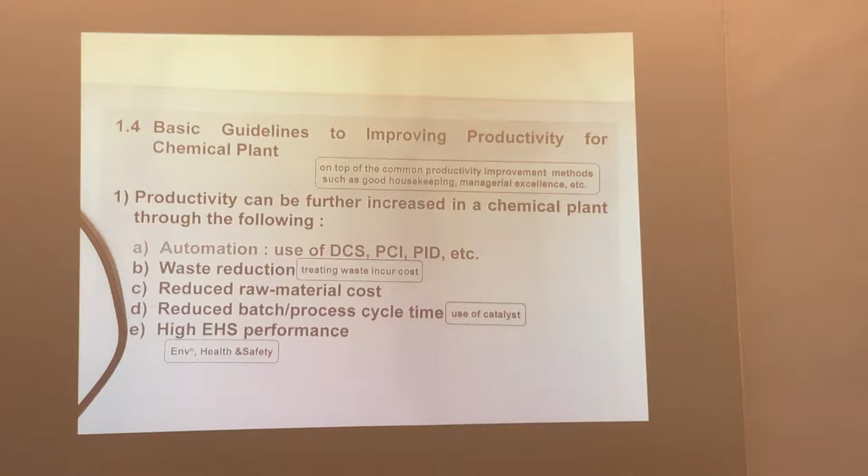So just turn it off. This one, okay. But then these people, they can't go see, you know. It's so bright, right.

Productivity doesn't necessarily always mean higher output. You can have times where the economy is bad, but your productivity can still go up. You can maintain the output, but reduce the input, and productivity will still go up, am I right?

It's just like now in Singapore, the banks are all making a lot of money if you follow their profit and loss statements. Why is the Singapore bank making so much money? It doesn't mean that we have so much more money to spend and give to the bank.

No, you notice that the banks have all introduced internet banking and whatnot, and you notice that many POSB branches have closed down already. There used to be one across the road, now no more. So they save on the cost, they save on the input. So even though the number of customers doesn't increase, productivity can still go up.

So don't always think that productivity must go together with an increase in output.

Let's look at the chemical plant. The best way to improve productivity in the chemical plant is to use automation. You can reduce costs, reduce input, or have better output, higher quality output.

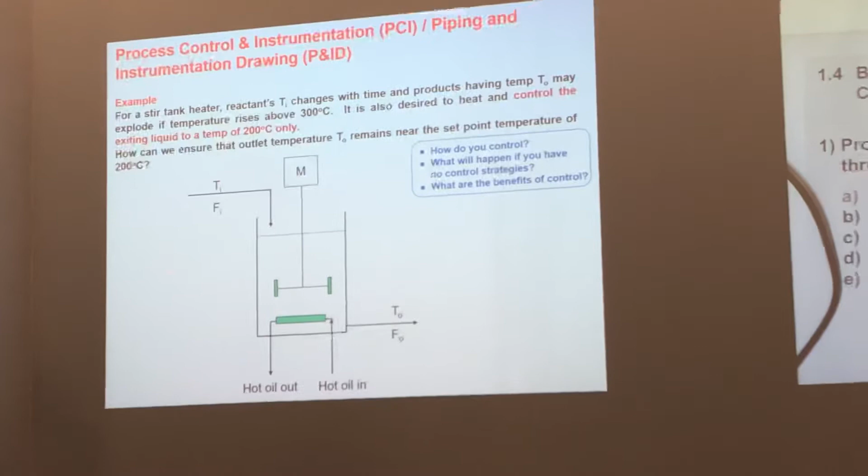In this case, you want to control the liquid at 200 degrees Celsius. So what do you control? How do you control it? What will happen if you don't have any of these control strategies?

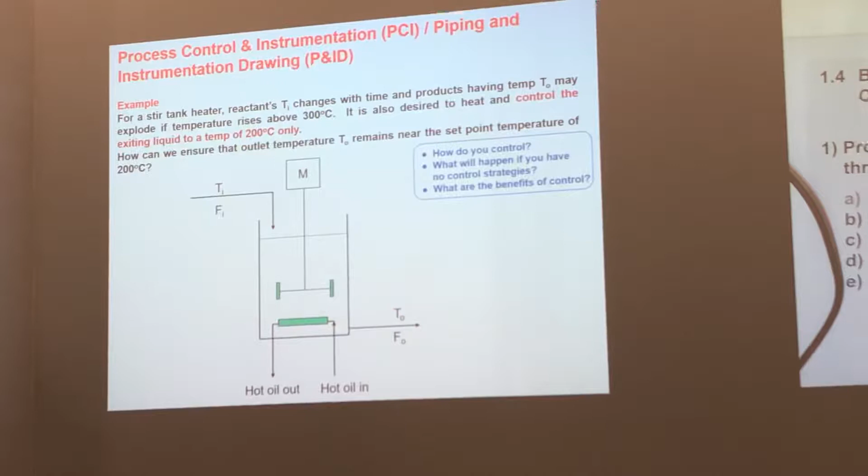If there's a high temperature or low temperature, the reaction is not ideal, right? So you need to introduce a control system, as you can see here, which is automated in nature. You must have a control system that can detect the temperature, which is what you want to control, 200 degrees Celsius. It must detect the temperature, and then send a signal to the controller, which will compare it with the set point value, which is 200 degrees Celsius.

And if there's a difference, the controller must send a message to the final control element, in this case the valve, to either allow more hot oil into the reactor to heat up the liquid more, or to reduce the flow rate so the temperature will not be too high.

Okay, so this is your P&ID, your piping and instrumentation drawing. In the P&ID you will learn there is a control. You want the control at 200 degrees Celsius. The control system are what? The sensor, temperature sensor, then the transmitter, the transmission line, the controller, and then your final control elements. So all these are part of your P&ID. I'll go through it fast since you learn this in your P&ID as well.

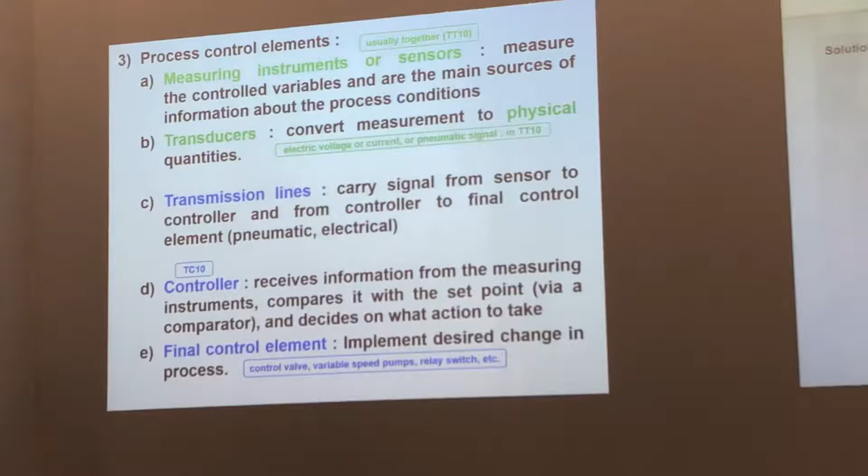Measuring instrument. In this controller, there are two things here, the very first one. One is the measuring instrument that measures what you want, a temperature, pressure, flow rate, or whatever. It must be the first one because it's in contact with the flowing liquid. So from here there's two functions: one is to measure the variable you want to measure, in this case temperature, and then once it measures...

There's a transducer inside this. The role of the transducer is to convert the variable you measure, such as temperature, into a physical value, such as current, voltage, or pneumatic pressure, all these sorts of things, and then transmit it to the controller via the transmission line.

You saw from your P&ID, if you have a slash like that, it's a pneumatic transmission line. If it's dotty like that, it's an electronic signal line, electrical. The rest is not so common. Most of it is the dotty line, which is electrical, or pneumatic, which is this.

So obviously it can't transmit the message '200 degrees Celsius,' am I right? It can't transmit, no, it has to change to something. Let's say 200 degrees Celsius is equal to maybe 2 volts. And then when it comes here, it will compare it with the controller. 200 will be 2 volts, so if it's more than 2 volts, maybe 2.5 volts, it will probably interpret that as high temperature. So the transmission line transmits the physical value to the controller.

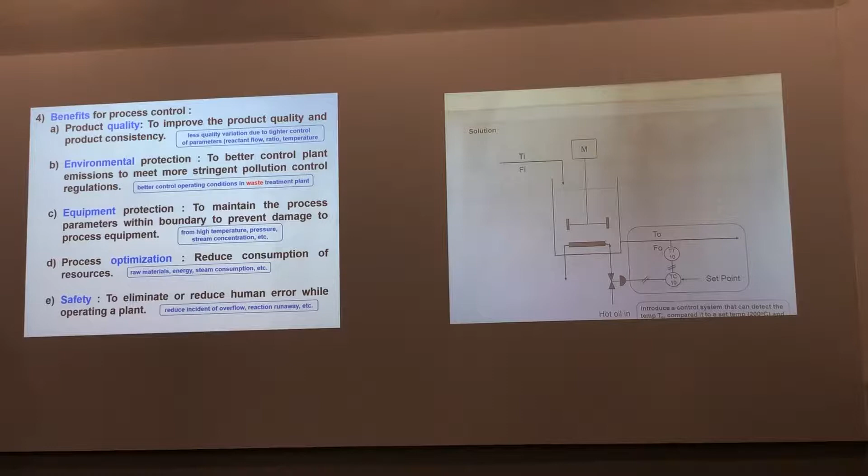Just now we talked about this already, the transmission line. Most of the time it's either pneumatic or electrical signal. I don't even have this slide. The balloon, you see all these sort of things here? No, balloon is different. Is it the same, exactly the same slides as your P&ID? No.

So your balloon here tells you what they are, what are they controlling. The actual instrument tells the function and the nature. So in this case you see a TT, that tells you what they are already. TC tells you another thing. The 10 is just the control loop number. So in this case, this is control loop number 10, meaning you probably have another control loop doing other things from 1 to 9 before that.

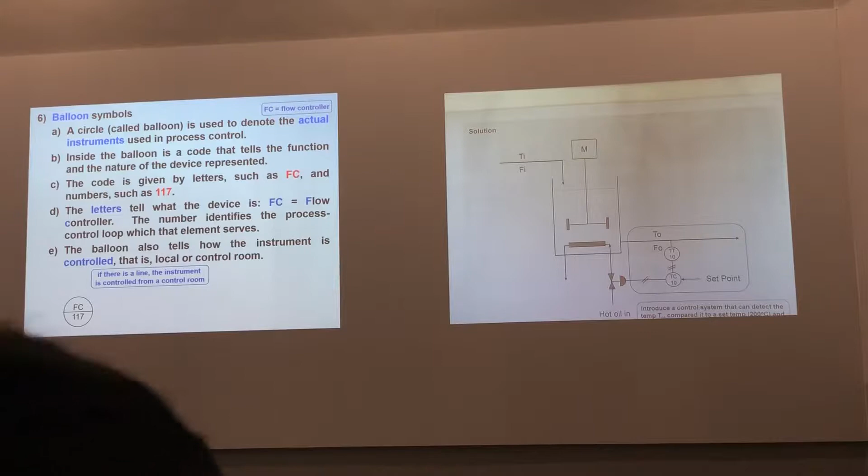The alphabet, depending on whether it's the first or second letter, tells you different things. For instance, take T. If it's the first alphabet, it means temperature. If it's the second alphabet, it means transmitter, which just transmits the value. So if you say TT, it means you measure the temperature and then transmit it. If it's FC, F is the first alphabet, so it means flow. C is the second alphabet, meaning control, so flow controller. Depending on the alphabet, it tells you different things.

If there is a line to it, like this one here, it tells you that this element, this flow controller, can be controlled from the control room, the DCS control room. That means changes can be typed in from the control room and reflected there without leaving the control room. But if there is no line, the control room can only see the value. If you want to make changes, you have to walk up to the plant and manually enter the value into the control elements there.

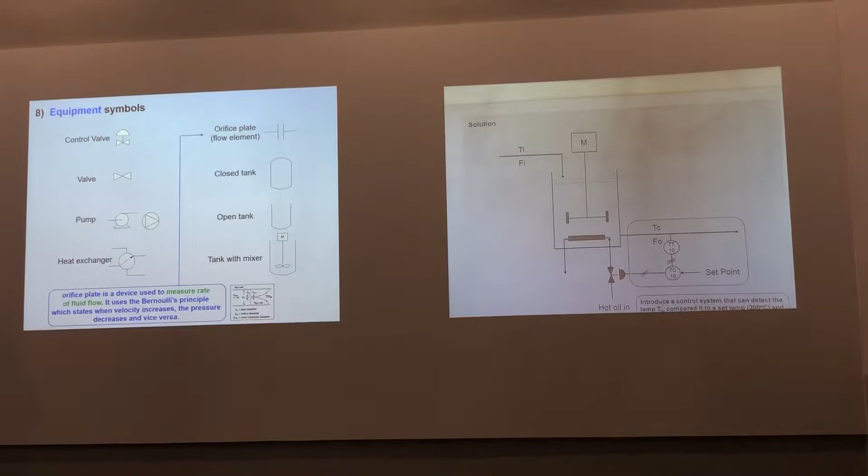These are some of the symbols we use in P&ID diagrams. We've done this already, so can you identify the elements of the control system here, guys? What are the elements of the control system?

This is T. The first T stands for temperature, temperature measuring. Then the second alphabet is also T, so it's a transmitter, which most of the time includes the transducer, which converts temperature to air pressure, pneumatic here. Then this will be the transmission line, the pneumatic transmission line.

This is your controller, the C, second alphabet, and this will be your final control elements. If the temperature is too low, it will ask the valve to open more to allow more hot oil to go in. All this is done automatically, so the temperature is always around 200 degrees Celsius, plus or minus a little. Every single second of the day, 24/7, this is working, always controlling the temperature tightly at around 200 plus or minus a little.

Certain terms you use in PCI: your control variable, your set point, your manipulated variable, your disturbances. Bear in mind that your control variable can be different from your manipulated variable.

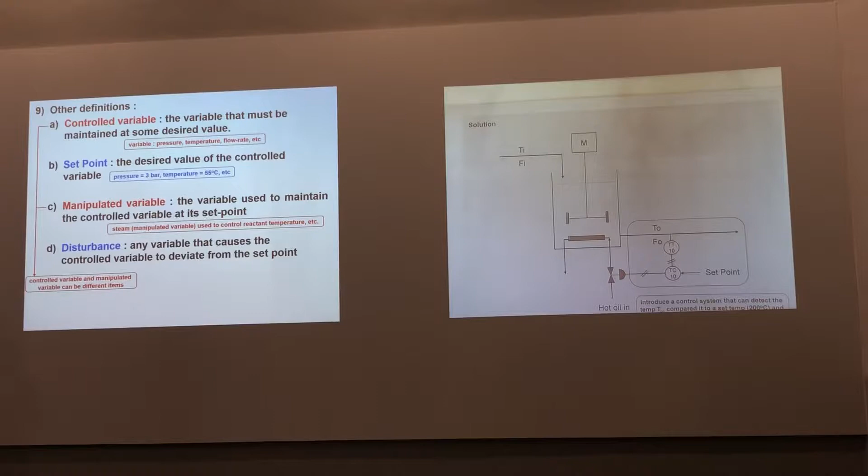Now, everything is answered, it's all there already. Can you tell me what the control variable is here? What do you want to control? You want to maintain the temperature in the tank at 200 degrees Celsius, am I right? So the temperature of the fluid inside the tank is the control variable. The set point is 200 degrees Celsius. The manipulated variable is what you manipulate to ensure the temperature inside is always 200 - the flow rate of the hot oil, not the temperature of the hot oil.

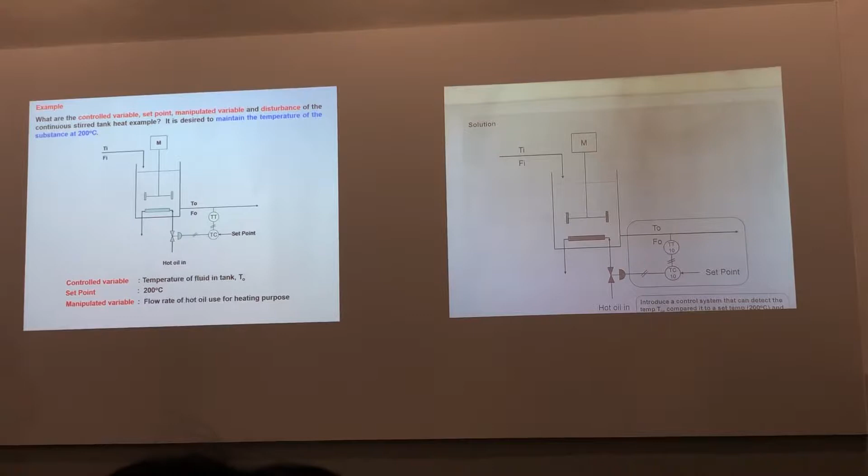And disturbances, how can the temperature not be 200 in the first place? It must be the inlet reactant temperature, am I right? So the inlet temperature could vary, could be more than 200 or less than 200. Alright, we go quickly through this one because you'll learn it again in your PCI course.

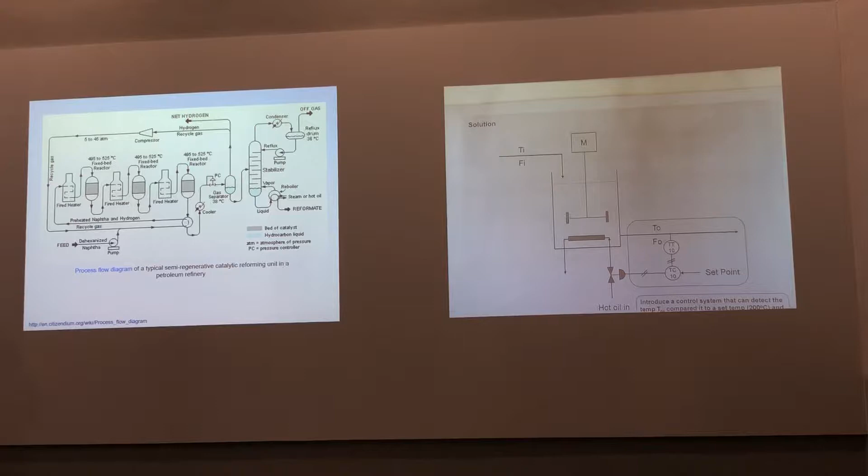Beside PID, you also depend on process flow diagram. Process flow diagram is much simpler. It gives you an aerial view, the overall view of the processes in your plant. You can see here there's a heater, a reactor, a distillation unit, all this sort of thing. It gives you a better view of the processes happening in your plant, and it shows where things go after each unit process. It's much simpler, so it doesn't have minor details like flanges, bypass lines, or control loops. But it does give you an overview of the process.

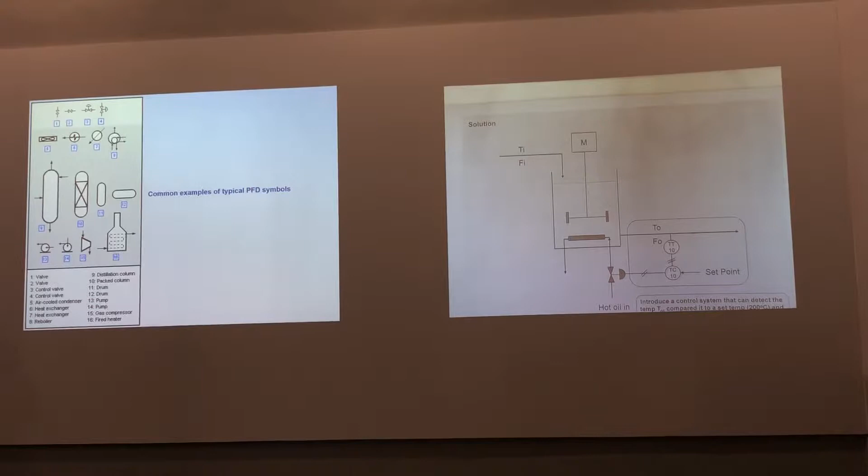Some of the symbols used in PFD diagrams: this is always a heater, a hot oil heater. This is your distillation unit, a distillation column. This will be your heater, heat exchanger like that. More of these PFD symbols you learn in your PCI, so I won't stay here too long.

Now can you just tell me the answer for this quickly? Is it distillation column? What is a distillation column, or a packed column? Pump - centrifugal pump.

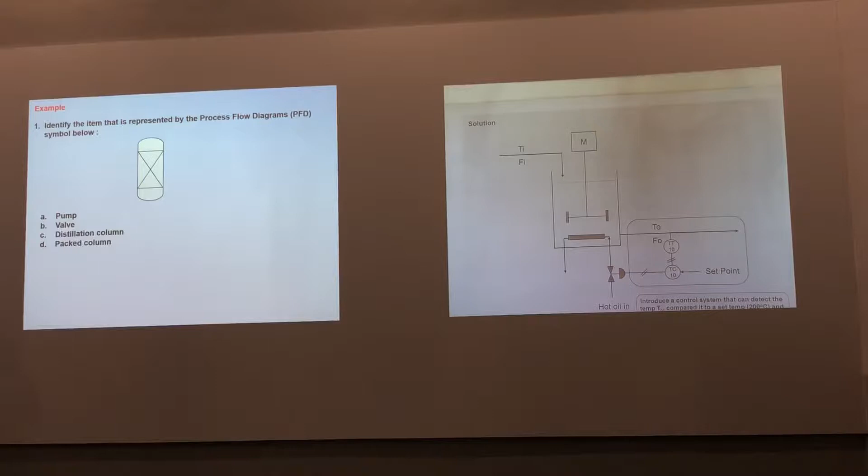What is it, guys? It is a pack column, pack column with the X inside there. Pack column means inside there is packed full of things. What's the purpose of the pack? To encourage interaction - make life difficult for the liquid inside to flow.

You have two liquids, either gases or liquid, most of the time liquid. One is flowing from the top, one from the bottom. So they have to go through this, turn here, turn left, turn right - more mixing time, more interaction, more time for one solvent to move to another liquid. You use this in your unit ops liquid extraction column. Okay guys, thanks. Anything to copy here? No, I guess, it's also provided. Everything is there, okay.

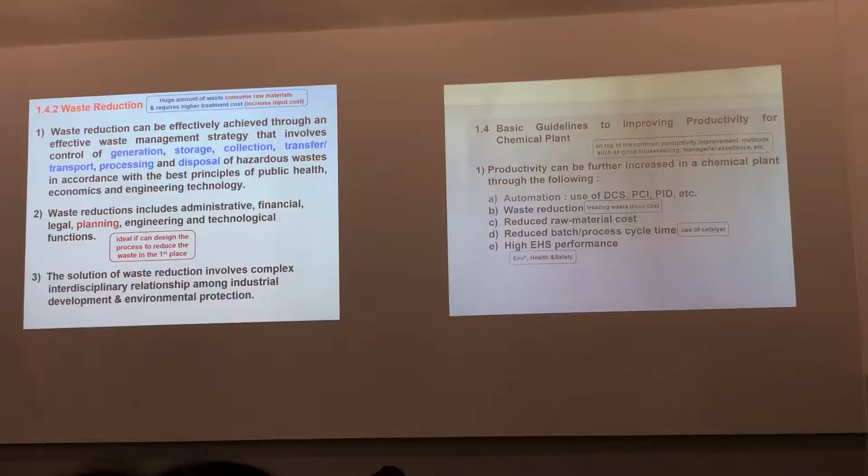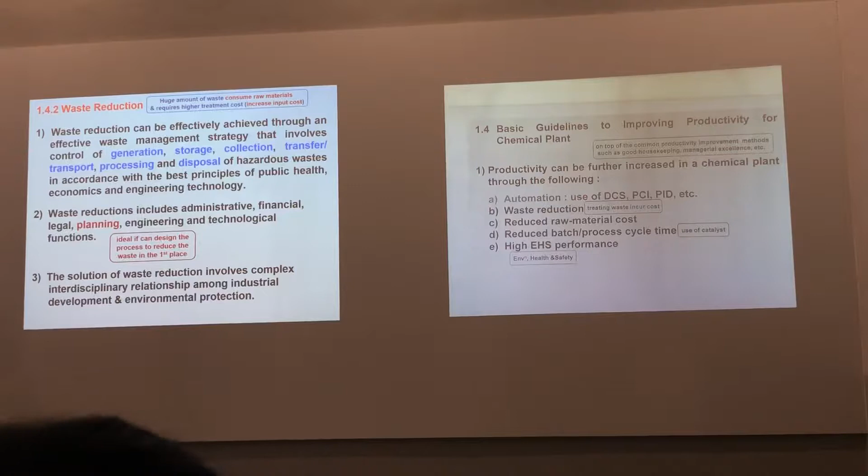Next, how can we improve productivity again? We can reduce our waste, am I right? Reduce waste means reducing your raw material costs, because waste always comes from raw material. You also reduce your treatment costs because waste generated needs to be treated. So you save two things: raw material cost and treatment cost. So on output divided by input, the input goes down, productivity goes up.

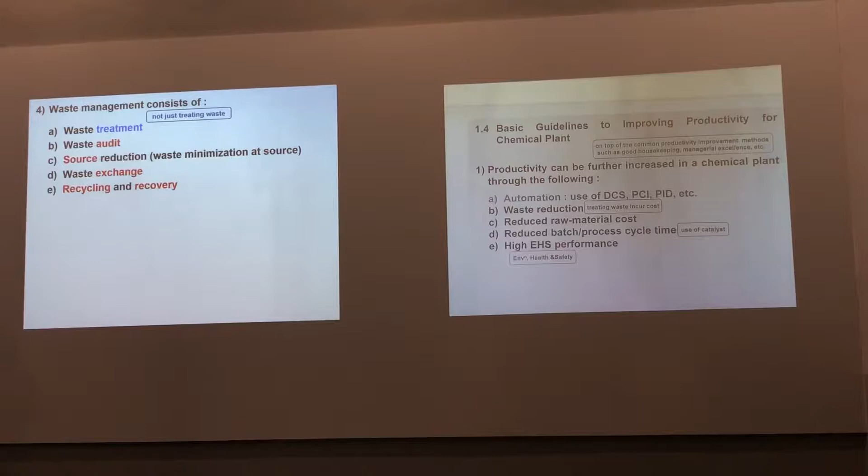Waste reduction is a big thing. You should monitor your waste from the moment you generate it until you finally dispose of it. The one you're familiar with is always treatment, but it can be more than just treatment when you deal with waste. Rather than treat the waste, you can exchange it, reuse it, or even recover it - not necessarily always treating it until the discharge limit and then throwing it away. So the one you're familiar with is waste treatment: coagulation, flocculation, ion exchange, all these sort of things. But you can reduce your waste by, in the first place, conducting a waste audit.

What is a waste audit? A waste audit is where you try to find out which part of your processes generates the most waste. And then, once you identify the stream that generates the most waste, you try to implement measures to reduce waste generation from this main waste generator.

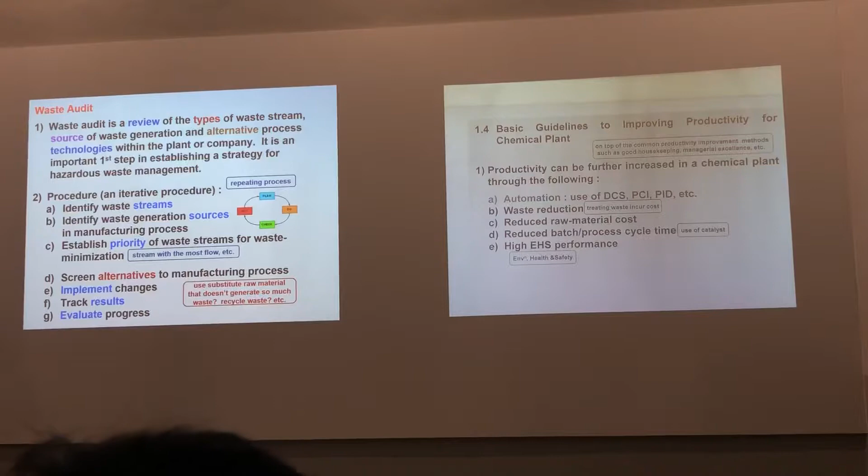So you must identify your waste stream first. Then, once you know a lot of waste is coming out of this stream, trace it back to the source where the waste is coming from, and then prioritize it. Maybe you have a few processes that generate this waste - which one is producing the most? And then once you get it, you know this particular process.

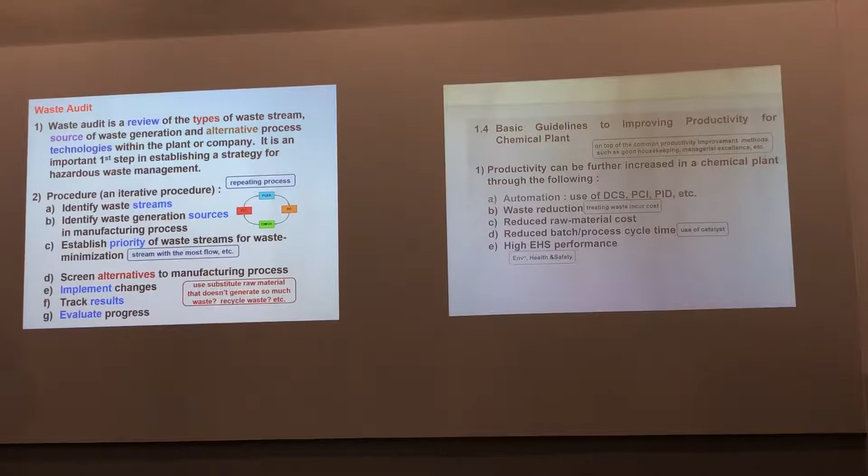Then sit down and think: is there any alternative way to reduce the waste generation? Can you substitute some of the raw material? Use a raw material that generates less waste, that doesn't contain those contaminants that need to be treated to meet discharge limits. Once you've got the alternative ready, you need to implement it and then track the changes to see whether it's effective or not. So that's waste audit.

You can also use source reduction. Source reduction is a very common thing that a lot of companies use.

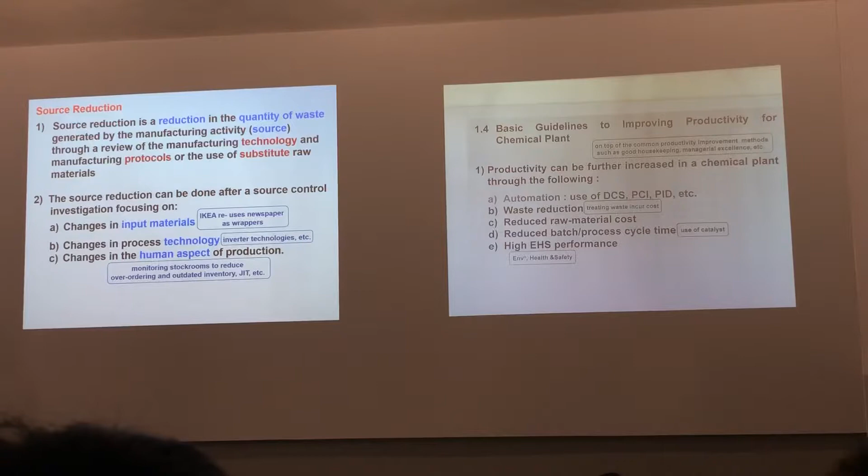What's the noise here? You've reduced it by half since last week, but the noise volume is higher than last week even. Why is that so? There's only one solution: waste reduction, source reduction. Can some of you not come next week again? You can reduce it further. You have the e-lecture, where you don't hear me scolding you. It's all sanitized, welcome everyone, blah blah blah. You might prefer that. No? Okay, so if you want to be here, let's not make so much noise so we can finish the quota today. My quota today is I have to finish everything, so as and when I finish the entire topic 1, we call it a day. If you cooperate with me, I can finish it faster.

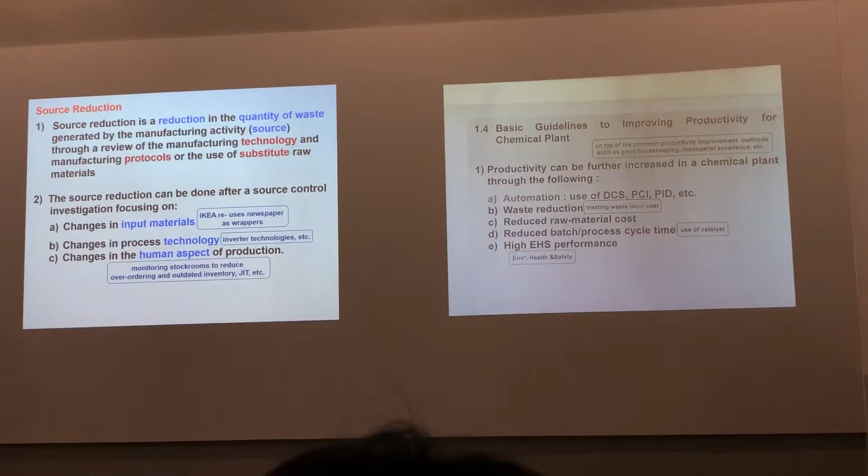So source reduction, very important. It's something that is practiced in all companies. What is source reduction? As the name suggests, it's a reduction in the waste at the source itself.

How do you do that? As the source generator of waste, how can you reduce the waste generation? Well, you can either change the input material, or you can use technology, or you can just change the way you do things - the protocols, your management system and stuff like that. For instance, with input material, you can use what?

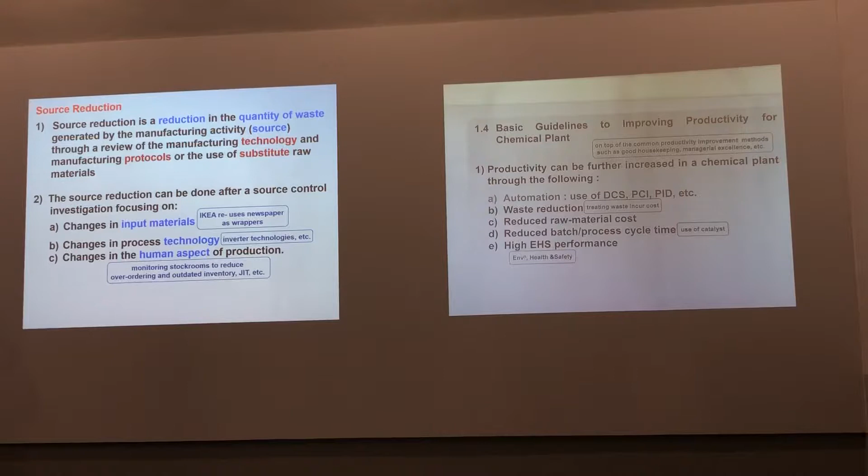A common example would be like IKEA. Last time IKEA used to provide their own paper wrapper, am I right? Now, later they changed to what? They get the old newspaper from you all, which is actually a waste. So rather than using fresh material as a wrapper, they use a waste material as a wrapper.

But in a chemical plant, how can you do source reduction in the form of changes in input material? Well, you can use purer material. There's always these two things: lab grade and industrial grade. Industrial grade purity is not as high as lab grade, so if you use the industrial grade one, there's more impurity. This impurity doesn't take part in the reaction, am I right? So it will appear in your waste stream, and then you have to spend more effort, more cost treating the impurities.

Using deionized water instead of plain water and all this sort of thing is better - rather than using regular water in, let's say for instance, a boiler. So less hardness in the water means less scale formation. Scale formation later means you have to put in more cost to treat the scales and stuff like that.

You can use substitution - using something that is less toxic to perform the same function. Like last time, we used dichromates. Dichromate is a corrosion inhibitor, right? But dichromate is very highly oxidative, so it's a mutagenic thing. So we can replace dichromate with phosphate.

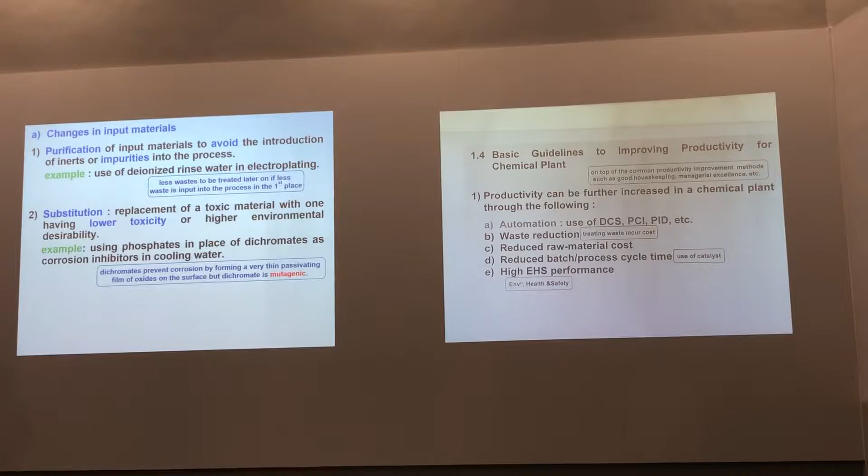The control on dichromate is very tight - you can't discharge dichromate as and when you like into the waste stream. You need to treat it until a very, very low concentration. You can use dilution, which is not a very good thing, or you can do housekeeping to reduce waste generation at the source.

How does doing housekeeping reduce waste generation? What is one of the bad things housekeeping wants to address? Like wet floors, am I right? Spillages, all this sort of thing - these are actually your waste, am I right? Your raw material is being wasted, spilled on the floor. So if you have good housekeeping, you ensure no spillages occur, and that essentially means less waste generation.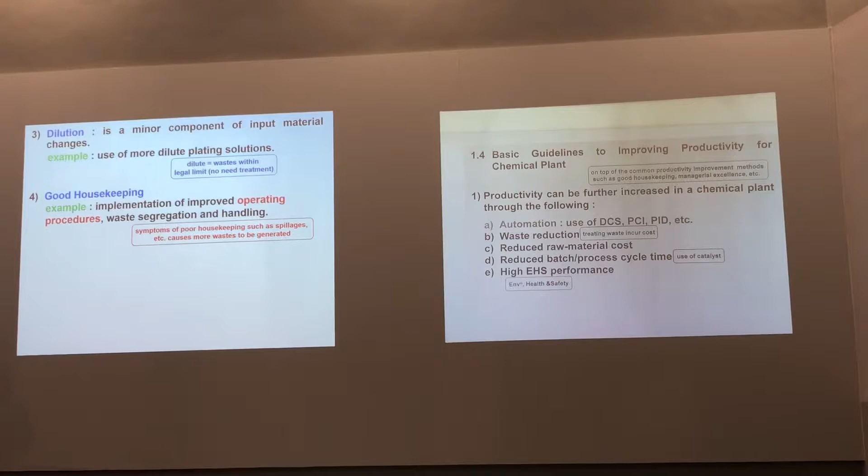In changes in technology - the other part about source reduction is change in technology. Nowadays, one common example is your aircon. Last time we used the old one where the compressor goes on and off, on and off, on and off. Every time the compressor kick-starts, there's a chance of damage to the compressor, and it also wears out the compressor very fast, and it's also costly.

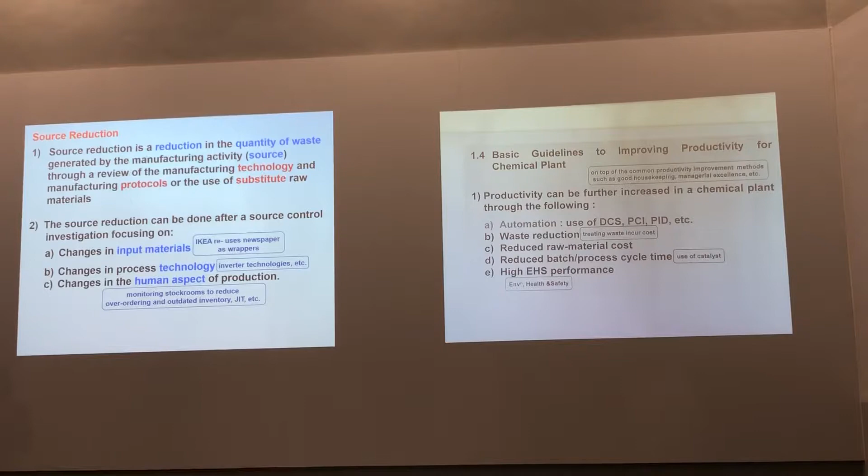So nowadays we use inverter technology, where the compressor is always operating at a very low requirement, so it's always humming around.

Less damage because it's always operating at this constant state, and less energy consumption as well. Other things like using automation, using email rather than paper, all these sort of things—these are technology, or could just be the way you operate.

You don't have to invest in technology, don't even have to look at your raw material. You can just change the way you do things. Like you can organize your production plant so that material doesn't have to travel very far to the next stage of production, because if you travel far you might spill it or overturn the trolley, and then it all becomes waste, all becomes rejects.

Or you can use a management system, like just-in-time (JIT) production, where you bring in raw material only when you want it, and you produce just enough product that the customer wants. So you don't bring too much raw material, so in case of no repeat order, the raw material doesn't go to waste, and you don't produce too much product in case there's no repeat order, then that product eventually becomes waste when it becomes obsolete.

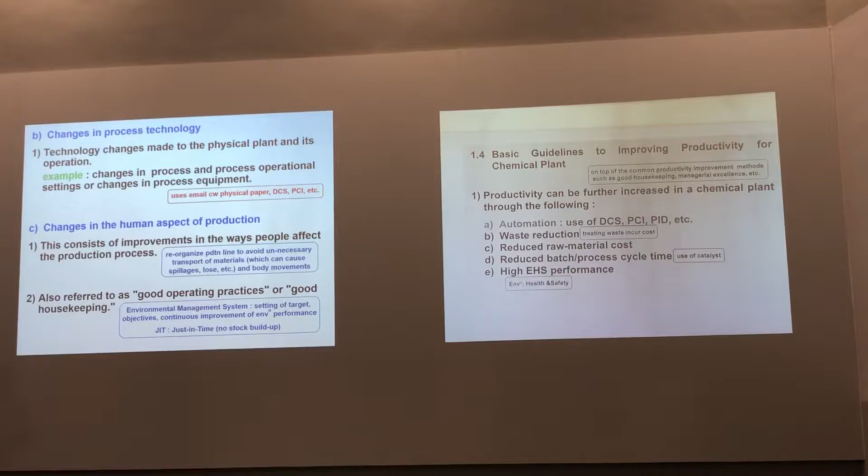So that is your human aspect of production. You can also have an EMS, environmental management system, which helps control your waste generation to a bare minimum, so you don't have to invest so much in treatment of excessive waste. That is source reduction.

Next, under waste reduction, you can have waste exchange. Rather than keep treating the waste in your waste treatment plant, the waste generated can be sent to another company. A lot of the time, believe it or not, your waste is actually very valuable—other companies may want it, some people pay money for your waste. So you can exchange the waste with another company who wants it, and that helps reduce the disposal cost for yourself.

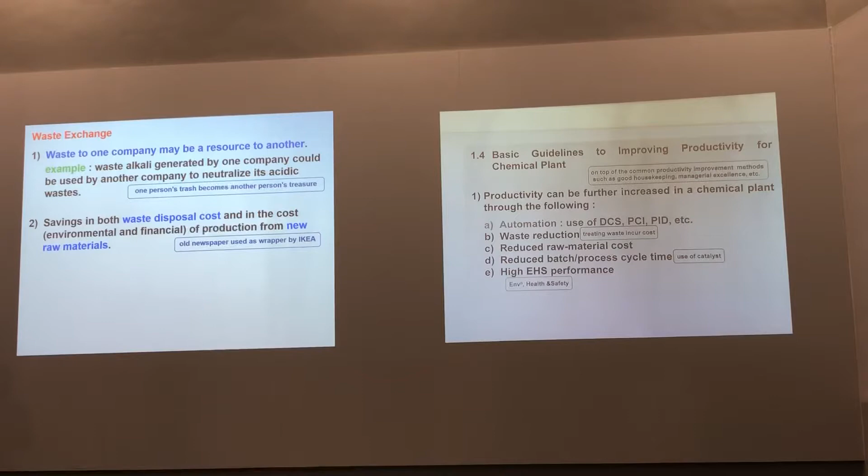Such as, if your company generates a lot of alkaline waste, you might want to give it to another company which generates a lot of acidic waste. So when you throw in alkaline, it actually neutralizes their acid waste—they don't need to buy alkaline to neutralize their waste, they can use your alkaline waste to neutralize their acidic waste.

You can also do the 3R thing—recycle the waste or reuse the waste. There are many ways that you can recover waste.

In the chemical industry, you can reclaim it this way. In circuit boards, for instance, what are all these lines? Those are your wires—they are copper wire actually. Your circuit board, which is the heart of every electronic component, started off as an entire piece of copper, with the surface all copper.

Then they etch away using copper etchant, so that you get the residual here—these are the remainder copper, which act as wires and so on. But the rest of it, all you see here, is already free of copper, because it has been etched away by the copper etchant. That also tells you that the copper etchant will contain a lot of copper, because it dissolves the copper away from the board.

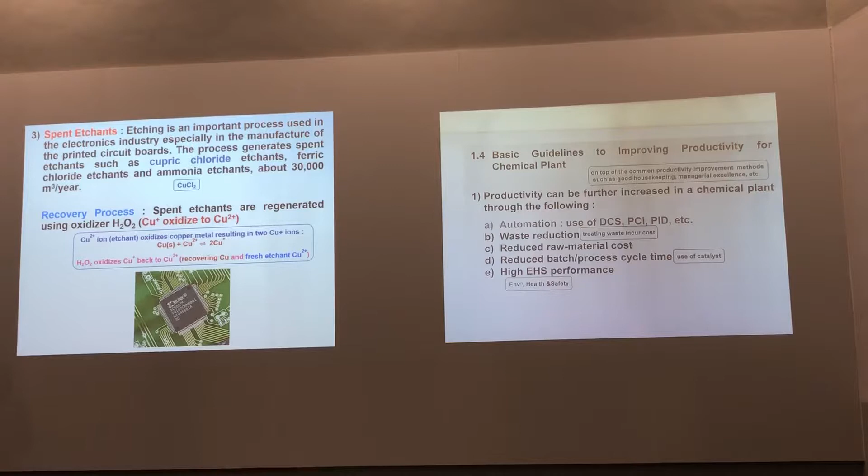So can you recover the copper? Yes, you can. The spent etchant—essentially, the copper solid of your circuit board reacts with the copper etchant, and both become Cu+. It's a reversible reaction. This is your spent etchant, because the original etchant must be Cu2+, so it can dissolve the copper, and both of them become Cu+.

You can oxidize this Cu+ back to Cu2+, but you need an oxidizer—hydrogen peroxide. When you introduce the oxidizer into the reaction, it shifts to the left hand side. If you shift to the left hand side, you not only get back the Cu2+ as an etchant, but you also get copper ingots, solid. That copper ingot you can sell.

So a lot of people, when they have a spent etchant with a lot of Cu+, they don't know what to do. They actually pay money for waste recovery people to take this off their hands. All these waste recovery people will come in, throw in oxidizer, and you get back fresh etchant and copper ingots, which you can use for your process again.

Okay, how else can you recover waste? In the chemical industry, how can you recover waste? Well, we use a lot of solvent, am I right? Sometimes our solvent, let's say acetone, chloroform, all this sort of thing, gets contaminated by other things. Like your UO2, you use the liquid extraction column. There is...

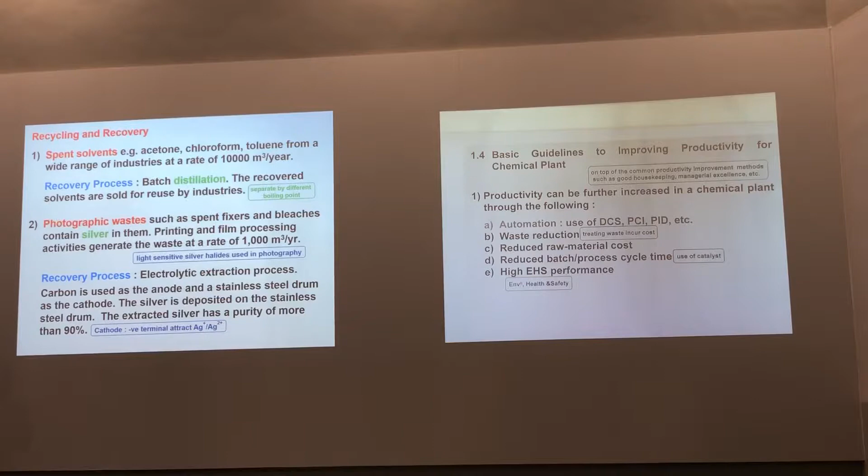TCE. Alright, inside the TCE there is propanoic acid. Propanoic acid is what you want, but it's inside a solvent called TCE, which is harmful. But you want the propanoic acid because it can be used as vinegar and stuff like that. How can you extract the propanoic acid from the solvent? Well, you can use a liquid extraction column, introduce a liquid, in this case water, in which propanoic acid is more soluble. So the propanoic acid will migrate from the TCE into the water.

Or you can use a distillation process. Distillation works based on what? Distillation is based on boiling point, am I right? You have different components - your solvent, your solutes, all these sort of things. All of them have different boiling points. So if you can separate them according to their boiling point, you can purify them.

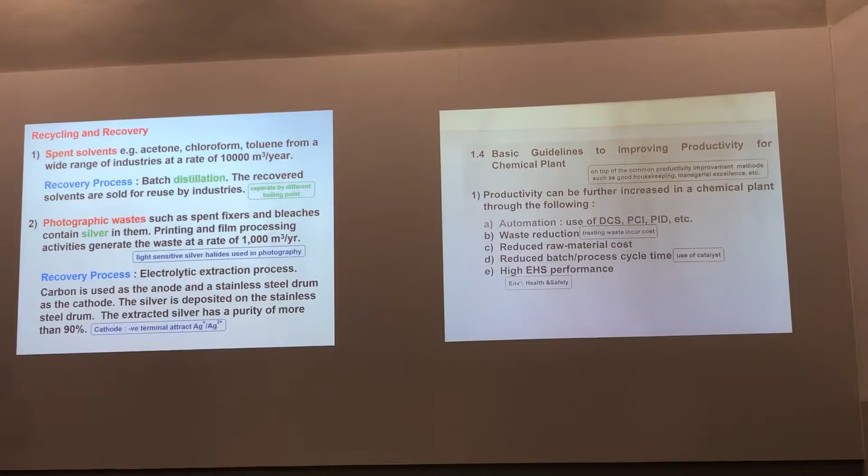Okay, it's just like our crude oil. Crude oil, if you ever see it, is like a sticky black color. It's totally useless because it contains a lot of foreign stuff inside. But if you can separate them according to their boiling point, you can get your jet fuel, your kerosene, all these useful products from there.

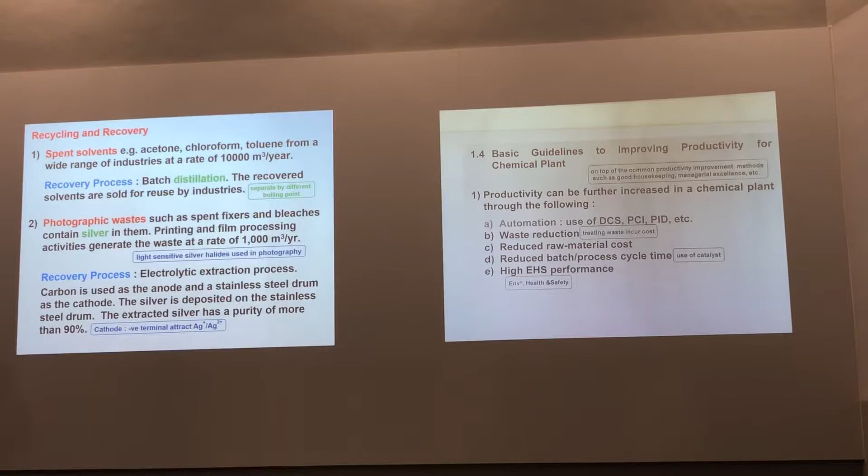Right, you can use electricity to separate, let's say for instance, photograph waste also. Right, like how they develop pictures and all these sort of things. They use silver - all this contains silver. You see how they develop negatives last time. You can use electricity because the silver will be attracted to the cathode, right?

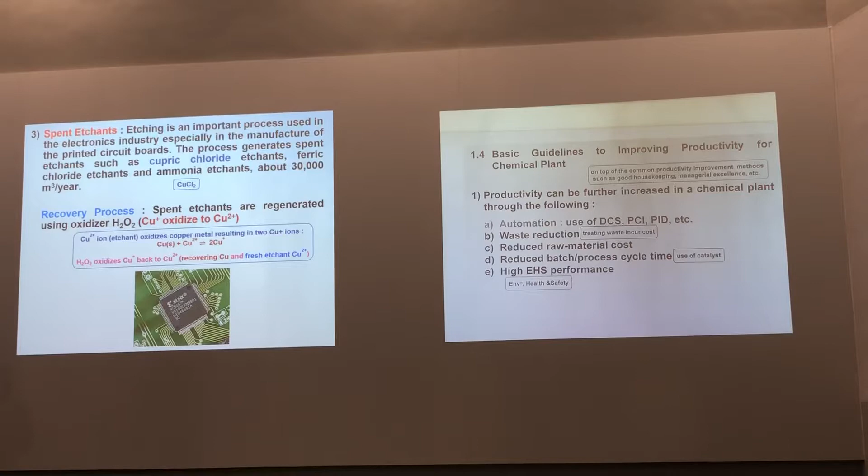We won't go into the details of the electrochemical reaction. We can play around with the left hand side, right hand side of the equation. If it's a reversible reaction, we can move the reaction to the left, to the right, like in this case. Okay, this is also important.

Right, next one, we're done with B. How else can we increase the productivity in the chemical plant? What can we do? We can also reduce raw material costs. How can we reduce raw material costs? One way is of course to reduce wastages. If you have less waste, then obviously you use less raw material.

You can also source around for cheaper raw material. Last time when we wanted to buy something, we always put out advertisements in the newspaper, but we only advertised for suppliers in Singapore. Nowadays, when a company wants raw material, they put it out on the internet, and the whole world can see it, and the whole world can bid for this business. So every company in the world will submit as cheap a quote as possible. That way you can reduce your raw material costs. So put it out on the internet rather than local news.

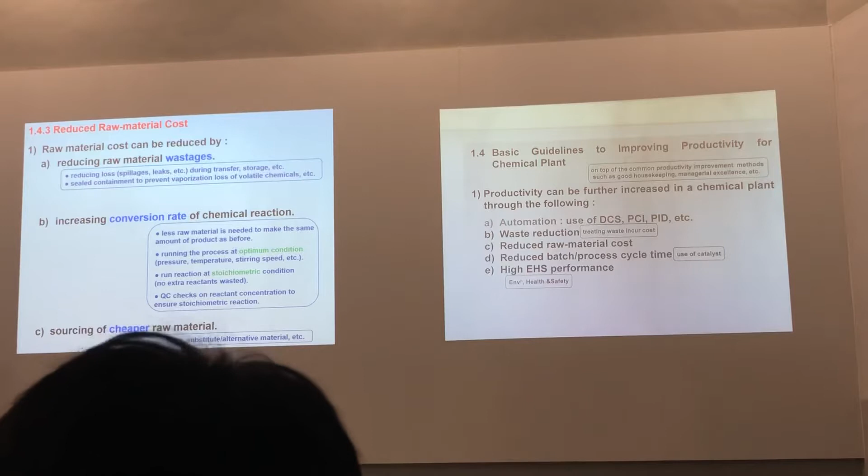You can increase your conversion rate. If your conversion rate is to completion, then you get more product, am I right? So if your conversion rate is only 90%, what happens to the 10%? Those are actually your raw material that never got reacted away. So they become impurities and they become waste. So how can you increase your conversion rate?

You can first of all react them in a stoichiometric condition. So if 1 mole reacts with 1 mole, make sure it's 1 mole to 1 mole - don't put 1 mole and 2 mole, because then the excess will become waste. You can make sure they proceed all the way to completion by reacting them at optimum condition - the best temperature, best pressure, best stirring speed and stuff like that. So make sure the conversion rate is 100%, correct? And the rest is like stoichiometric condition and QC checks.

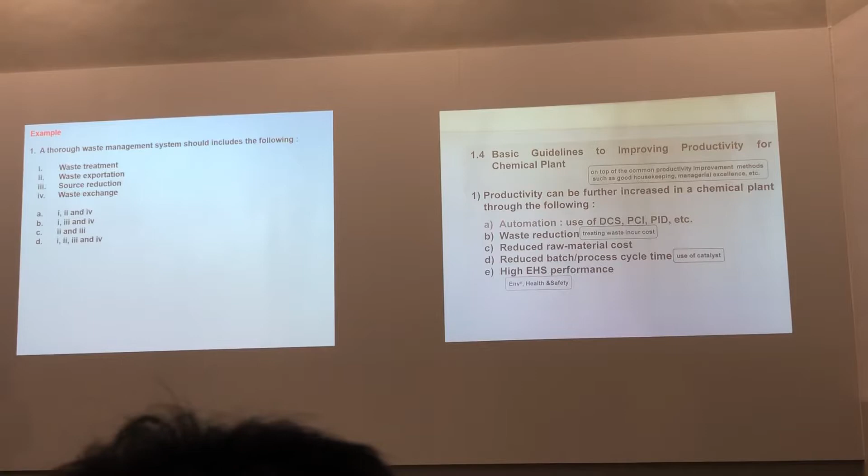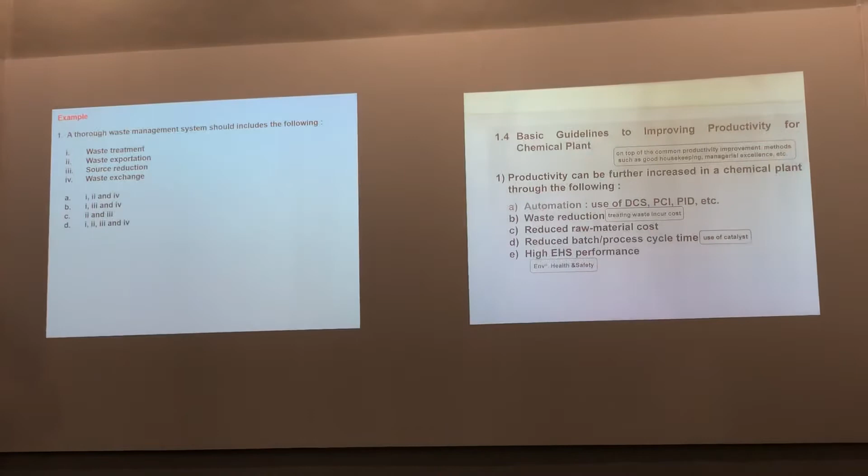Next week's topic also comes out in section C of your term test, which is like 20 marks. Term test is 70 marks. If you do well for calculation, it's 20 marks. You write your name, that's another 10 marks, so 30 marks already. And you write something nice, that Zach Su is the best teacher in the world, you get extra 5 marks, then you pass already.

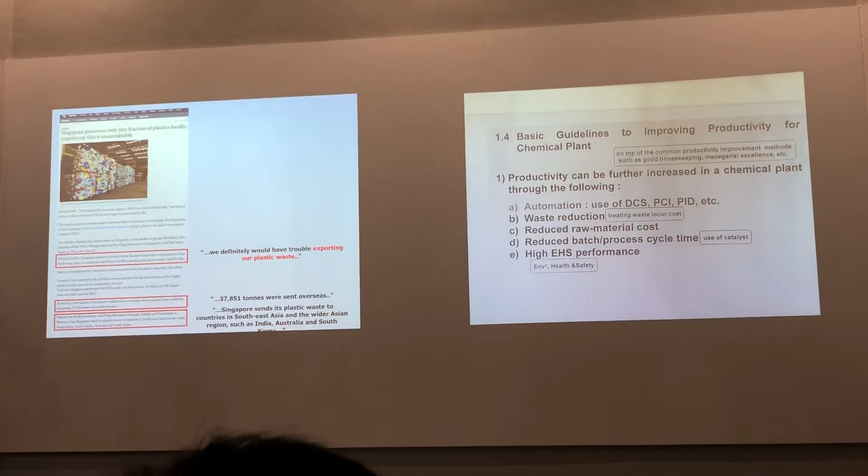Only 7% is recycled. Tell me what happened to the rest of the 93%? 37,851 tonnes of it was sent overseas to where? India, or Southeast Asia, and so on. Some may treat it, but for some third world countries, if Singapore can't treat it, do you think this third world country can treat it for you? So it ends up in a third world country, and you know what third world countries do?

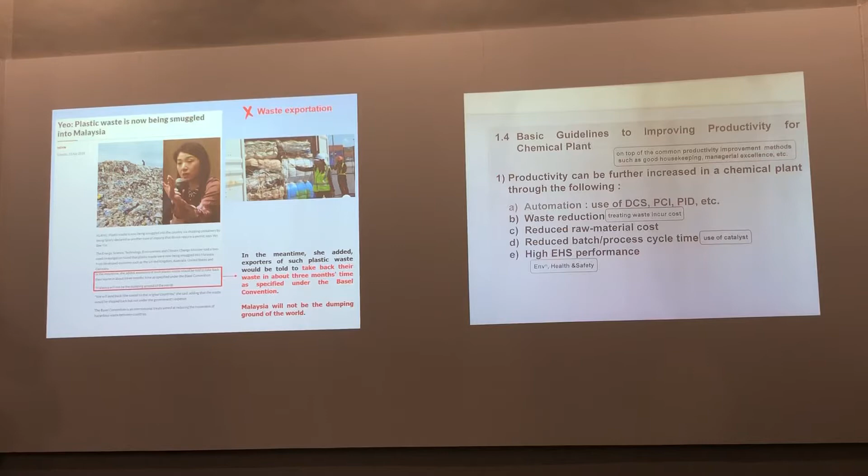Third world countries will just do what they want with plastic waste - they'll just burn it, because the law there is so lax, nobody will enforce it. So all this dioxin goes into the environment, and the third world country environment gets sick. So, no waste exportation, please. Sometimes you take your plastic waste and throw it in the bin thinking you're saving the environment, but you're actually contributing to the pollution.

How else can you improve productivity in the chemical plant? You can produce more output - how can you produce more output? You can reduce your reaction time. If it's a batch cycle process, you can reduce the batch cycle production time so you can produce more in a year. So more output means more productivity.

If you can produce more, then the improvement in quality will also be greater. Because when you produce more, the customer gets the product faster, they can give you feedback faster, you can make fine-tuning faster, and the product quality improves faster as well.

How much can you produce a year? It's controlled by a simple formula: what is your reactor size? Maybe 5 tons - that means you can produce 5 tons of product every batch. Multiply that by how many batches you can run in 1 year. So if you can produce 20 batches in 1 year, each batch being 5 tons, your annual production will be 100 tons. Makes sense?

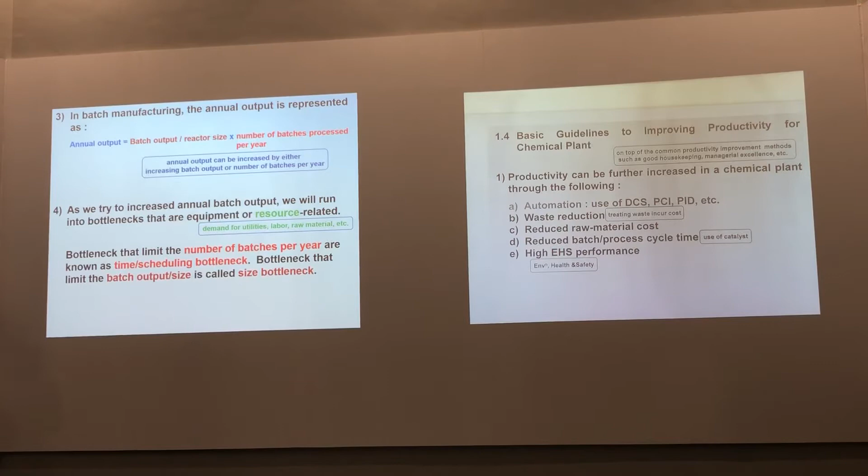Let's look at this one here - you have a unit process, these three. After 3 hours: 1 hour here, 1.5 hours, 0.5 hours here. After 3 hours, how many tons of product has this produced? 3 tons.

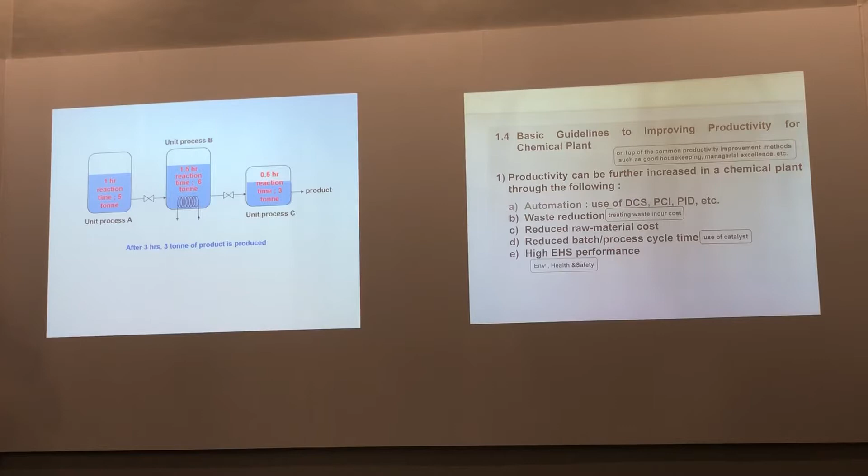Even if this one is done producing, not all of it can go into this reactor here - 6 tons must take its own sweep time to go in. Okay, so that's some of the bottleneck definitions.

How can you solve for time bottleneck? You can have more equipment producing in parallel. Let's say this one is time bottleneck B - it's taking so long, right? You can have another unit process B running parallel to it. So within 1.5 hours, instead of producing 6 tons, you can produce 12 tons.

Or you can have a staggered mode, meaning you don't wait for this one to finish before you pump it in - you can do it at the same time. While this one is reacting, you can start producing the new batch of product here already, staggered. You don't have to have everything waiting to go inside here.

The explanation is here. For size bottleneck, you identify the vessel that is already running at the highest size utilization. That will be the reactor that is being stressed out, running at the best that it can already.

Once you identify it, you can either add more vessel to it—maybe another one of this here—or you can run it at maximum volume. Maybe it can do 3 tons here, but maybe you can run more, top it up higher a bit. So if maximum volume is here, why are you running at the blue line? You can run it more, okay?

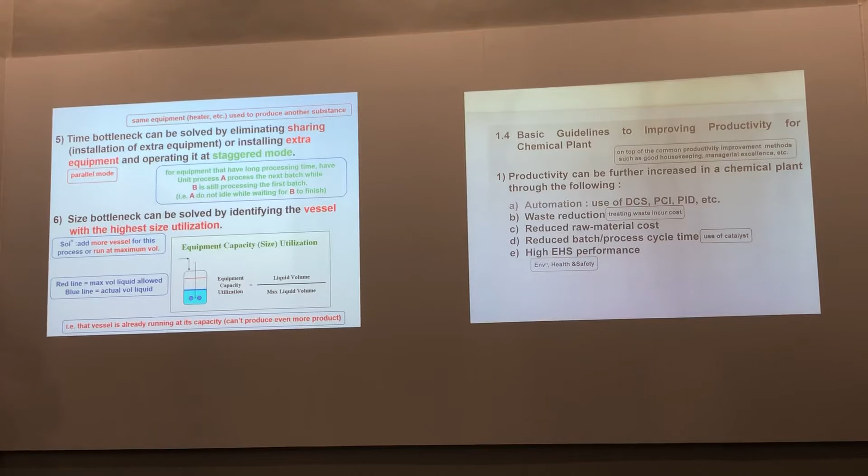Right? So that is size bottleneck. Or what else can you do?

You can move—why is this thing at 1.5 hours? Why does this reaction take 1.5 hours? Maybe because when you charge it in, then you need to heat it up, am I right? The heating takes a while, maybe 30 minutes to heat it up to the optimum temperature.

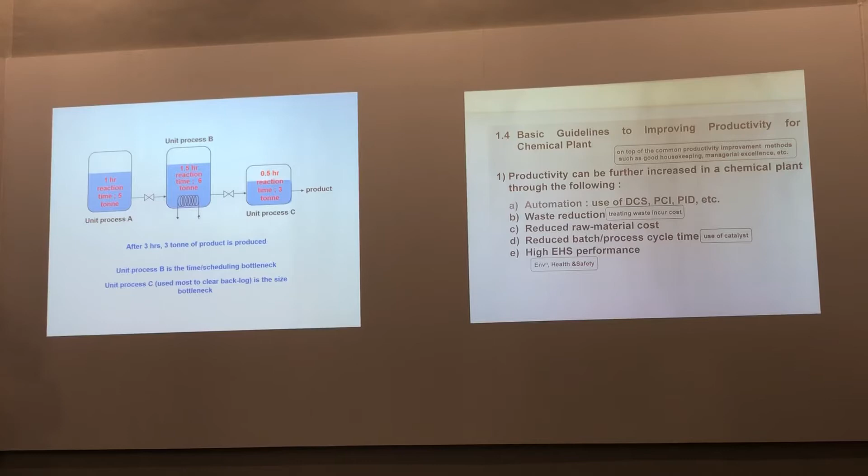So you can take out the secondary operation, move it outside like this, so that when it's flowing into here, there is a heater already to heat up the liquid entering the reactor. By the time it goes inside there, it's already at the reacting temperature, and the reaction can start already.

If you put the heater inside there, it's trying to heat up the bulk liquid—6 tons—it's going to take a while, am I right? But if you put the heater outside, every time a little bit flows through, like 5 liters per hour, it's easier to heat it up faster, am I right?

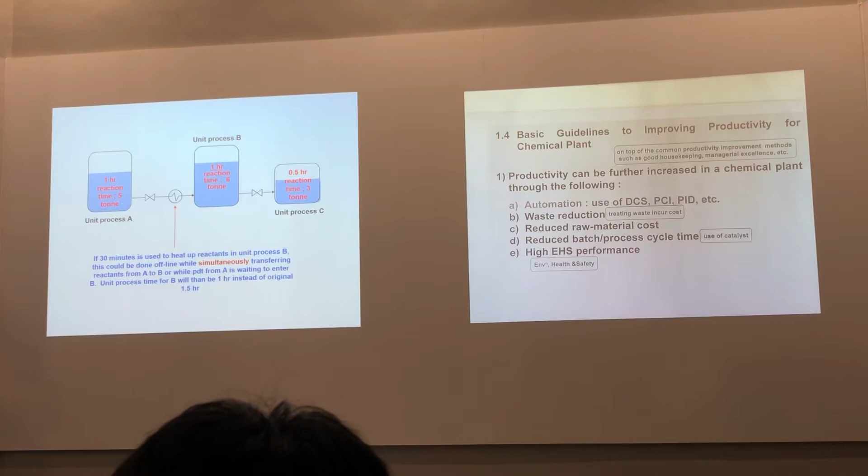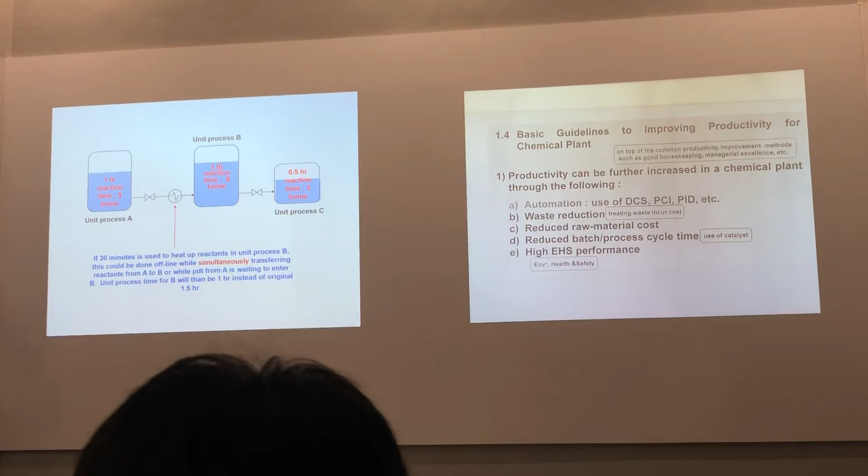So you can move the secondary operation outside. Rather than 1.5 hours inside here, the 30 minutes of heating is conducted outside at the same time it's flowing in, so there is no time wastage. And then you can reduce the timing to 1 hour. So that is another way you can solve for time bottleneck.

How else can you reduce batch cycle time? How can you accelerate the process? You can use low pressure or vacuum. Last time in my batch process we used vacuum.

What's the purpose of using vacuum? When you use vacuum, what happens to the boiling point? It's lower, am I right? So the thing will boil faster.

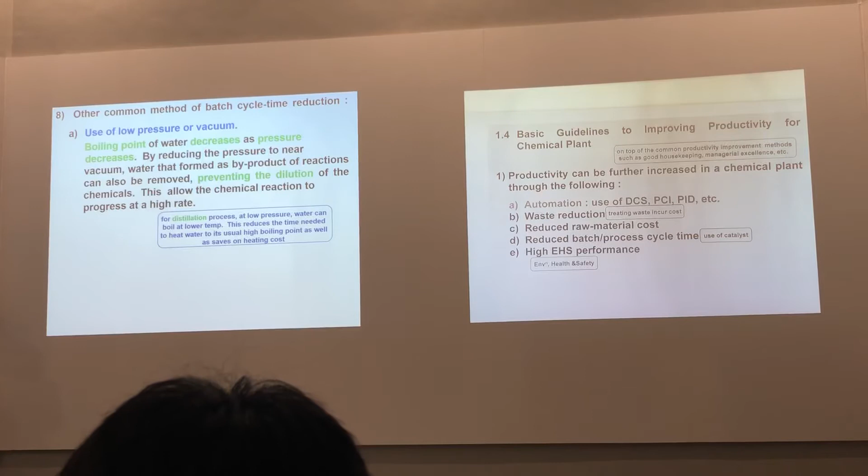Why do I want to boil something? Let's say, for instance, I want to remove water—say the byproduct of my reaction produces water. What will water do to my reaction? It dilutes my reaction, am I right? So my reaction rate will go down.

So if I can introduce a vacuum or low pressure, I can suck out the water vapor, which vaporizes very easily because the boiling point has dropped. So I can suck out the water vapor, and the concentration becomes more concentrated, so it can react faster. This is one way—prevent dilution of the chemical by sucking out the water vapor.

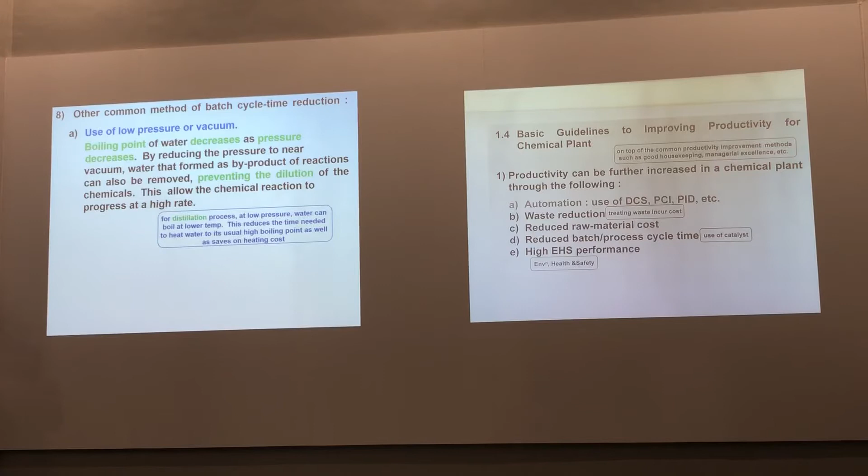That will cause dilution. What else? In your waste treatment plant, you study IWT.

Have you studied chemical processes? Some processes involve waiting for things to settle down, like your muddy water. Can you discharge muddy water into the sewer? You can't. So you need to let the suspended solids settle down first.

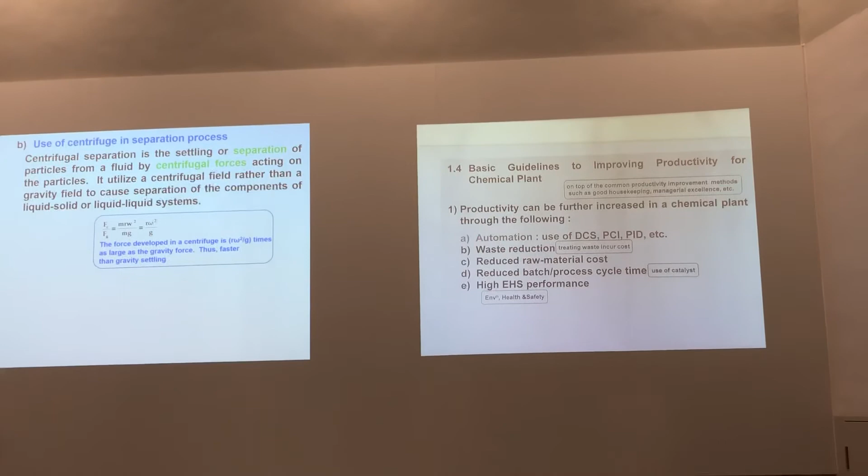Most of the time, we only depend on gravity to settle things down, am I right? But sometimes gravity is very slow, especially when the solid is very small. Can you accelerate the settling process? Yes, you can, using a centrifuge—centrifuging presses the heavy things to the side. So rather than gravity settling, you can use centrifuge settling.

What else can you use in a chemical plant to accelerate the process, reduce the batch cycle, or reduce the reaction time by speeding up the reaction? We can use a catalyst.

Catalyst is supposedly the best thing in the world. It increases the rate of reaction, but it did not get used up. So theoretically, it can be used forever. But in real life, it doesn't work that way.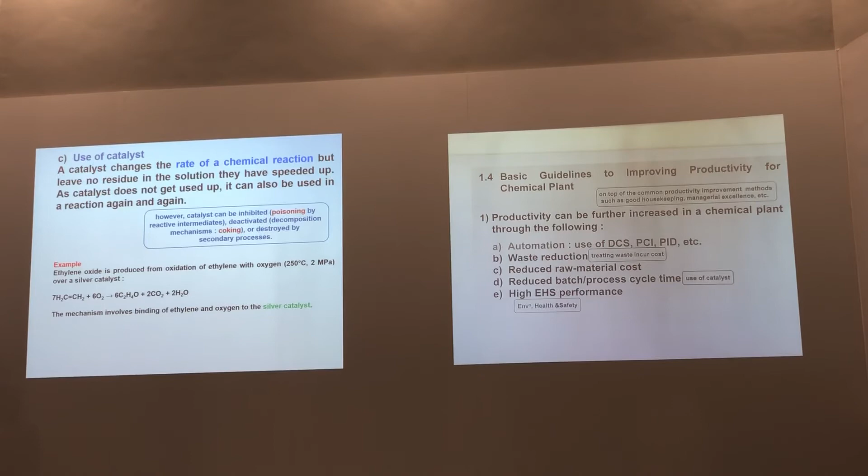In real life, the catalyst—because catalyst reactions are always surface reactions—after a while the surface of the catalyst gets contaminated, oxidized, or other chemicals sit on it, and then the active sites cannot be used to promote the reaction. So although it has a limited lifespan, during the time it can be used, it really can accelerate the reaction, producing more output.

Okay? Can you answer this question?

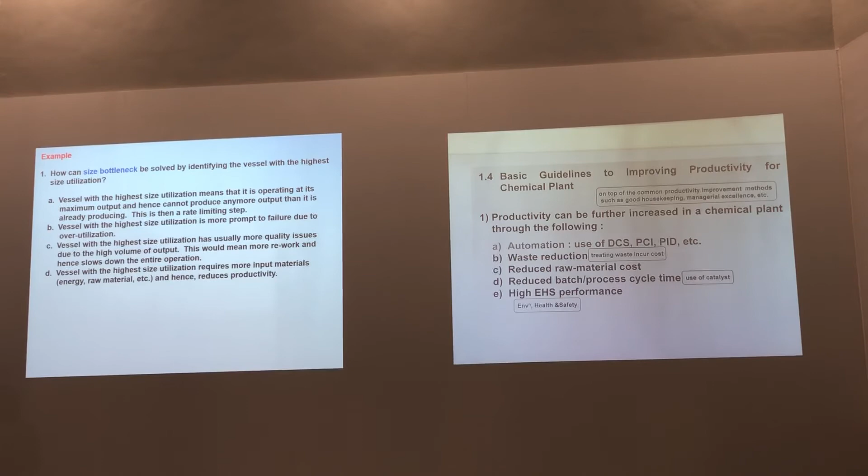Higher size utilization means you're running this reactor as hard as you can. That means everybody wants to go into this reactor. So what can you do once you identify this reactor?

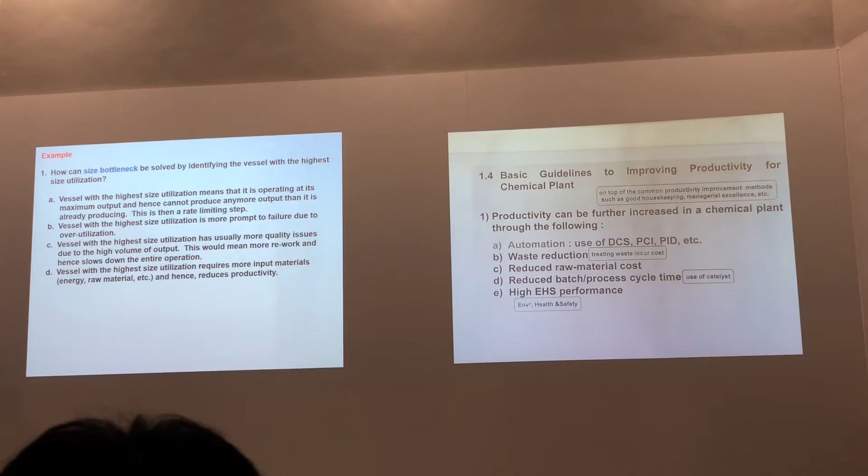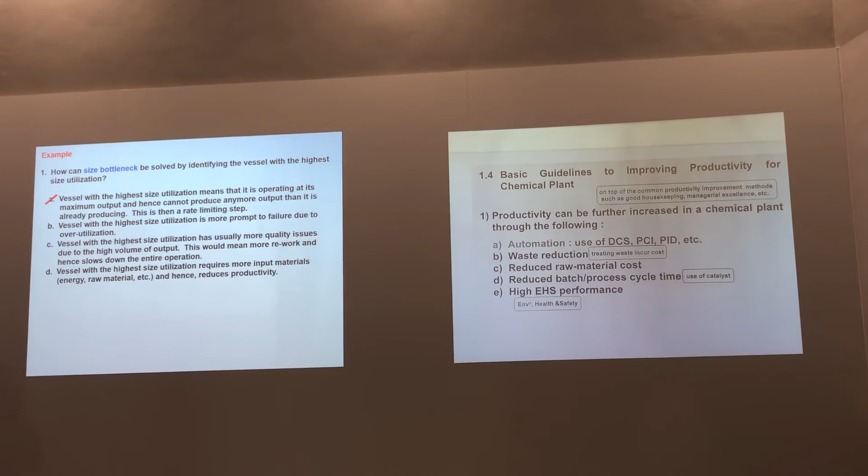It is the rate limiting step, am I right? It is the rate limiting step. You cannot put any more, it's already producing. So once you identify this bottleneck, you can take action against it. Maybe produce another one, introduce another similar reactor, or see whether you can increase the volume of this reactor and run it at higher capacity, rather than 5 tons, you run it at 6 tons.

Okay, last way productivity can be improved in the production plant is by higher environmental, health and safety performance. How does better safety and health performance help improve productivity?

Safety and health also related to productivity? Well, in the sense, yes, because it helps reduce cost, and cost is input of productivity. Productivity is output over input. So if you can reduce cost, you can reduce input, then you can have higher productivity.

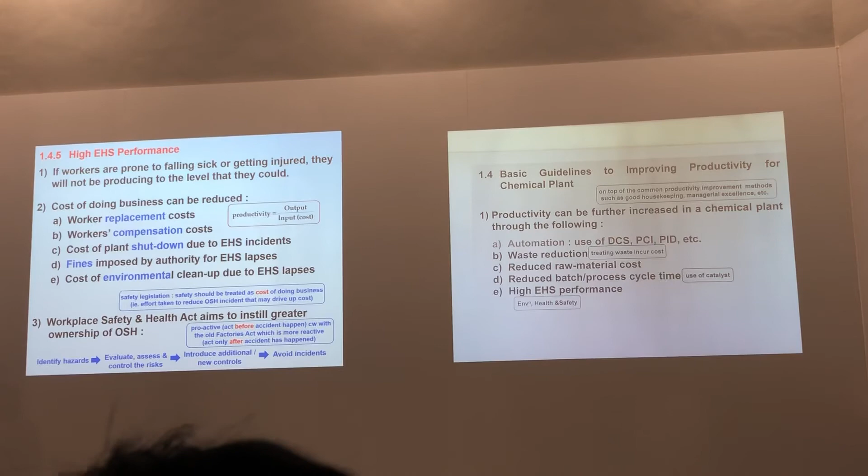What kind of cost? Well, if your worker dies or gets injured, you need to find some replacement. So there's a worker replacement cost. There's a compensation cost - if they get injured, there's WICA. Remember WICA? No, you don't remember WICA because you haven't studied it yet. Year 3 you study WICA. It's about injured workers needing to be compensated - you can't just throw them away and run.

Then there's cost of plant shutdown. If you have an EHS accident, like a fire, 6 months no production. So the total cost - compensation cost, your customers, all this - is high. Or the authority will come and fine you for all your defects, shortcomings that led to the accident. So all this adds up to your cost.

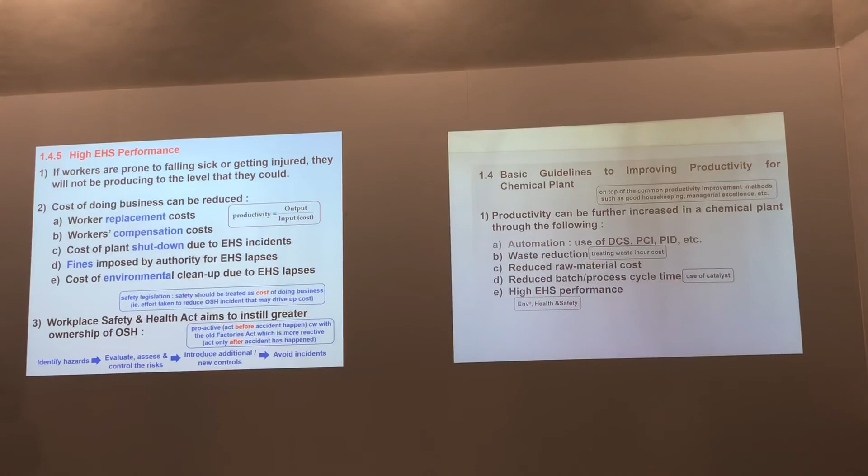Environmental as well. If your environmental performance is very good, chances are you have less accidental release into the environment. If there's accidental release, like fishes turning up dead, and they trace it back to you, then the NEA will ask you to clean it up, or even fine you after that. So less environmental cost, cleanup cost.

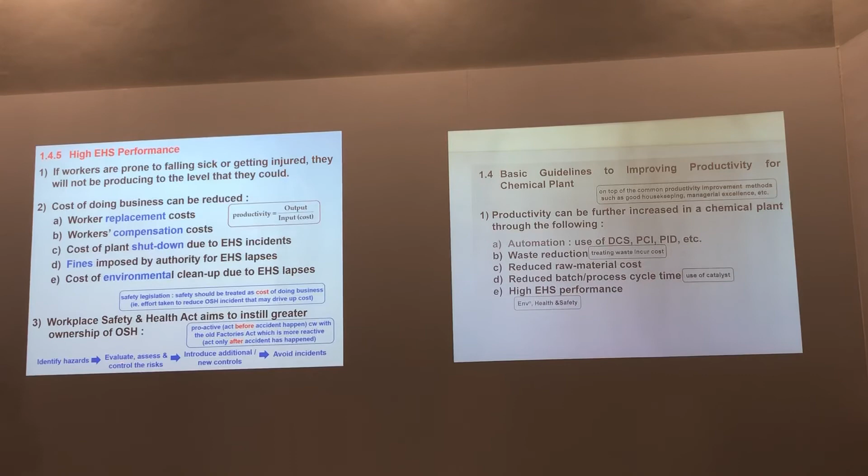Remember your OSH legislation, the WSH Act? WSH Act is a proactive safety legislation, where we ask you, even before the accident happens, to find out the hazards of your processes, and then find out the risk level of those identified hazards. If the risk level is very high, take action to introduce new control measures, such that the risk level can go down from medium risk to low risk.

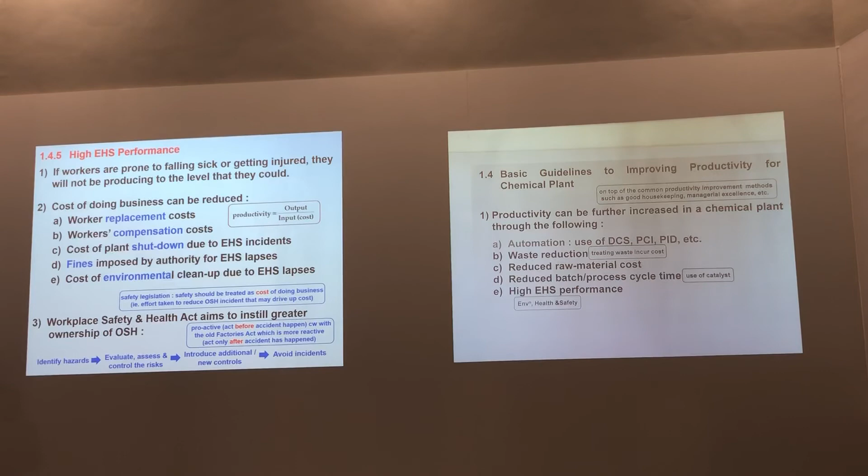If the risk level goes down, the chances of the hazard manifesting itself as an accident will be reduced. So even before the accident happens, you already take additional control measures to reduce the chances of the accident occurring. That is how you reduce accidents in the workplace. By having high EHS performance, there's less input cost, so higher productivity.

Last question, and then we are done for the day. Make sure next week you must attend. Even if you attend, I think you also go La La Land. It's quite abstract next week, but it's very important because you come for your term test.

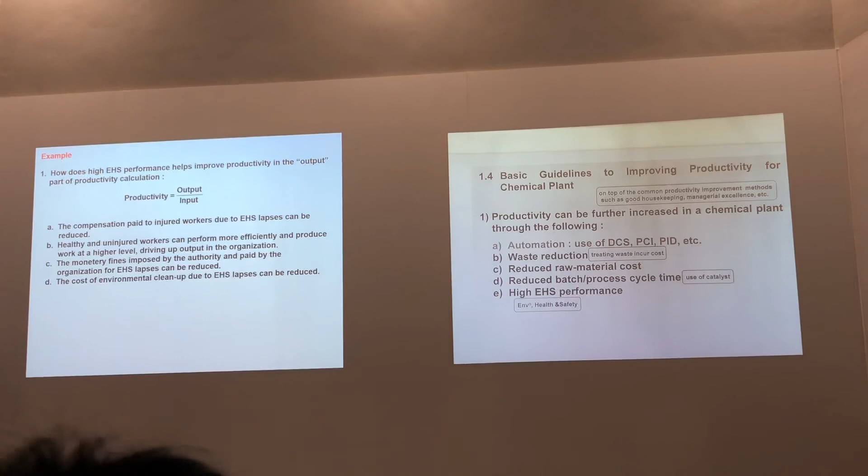There you go, we finished in 1 hour, so kudos to you for not making too much noise. And because you are so well behaved now, you earn yourself 1 hour to do work, to do your projects, am I right? Yeah, do anything that your heart desires.

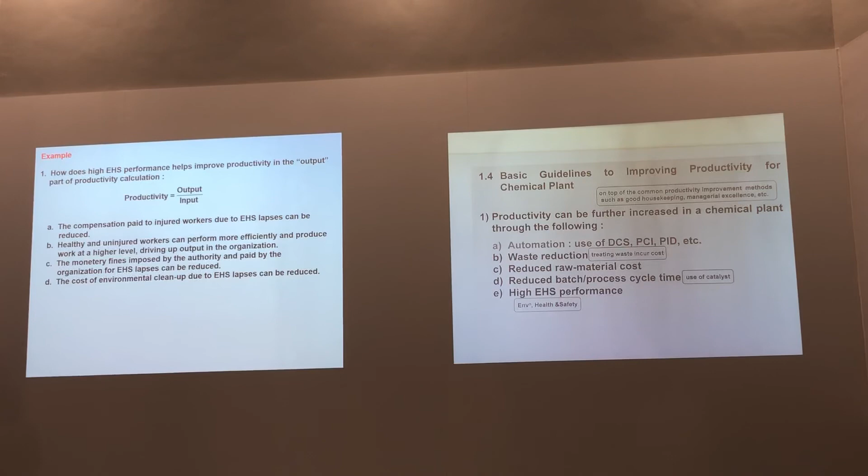Answer is? How does it help improve productivity in the output? Not only the cost, but it can also help with the output. If workers are injured, can they perform at their best? No, right? They have injuries, so they only have one hand to do work, so their efficiency is not there. So an uninjured worker can perform more efficiently, produce more output, or output with fewer rejects.

Okay? Alright, so that's all for today. Thanks to you for not making too much noise, and you can finish it soon.